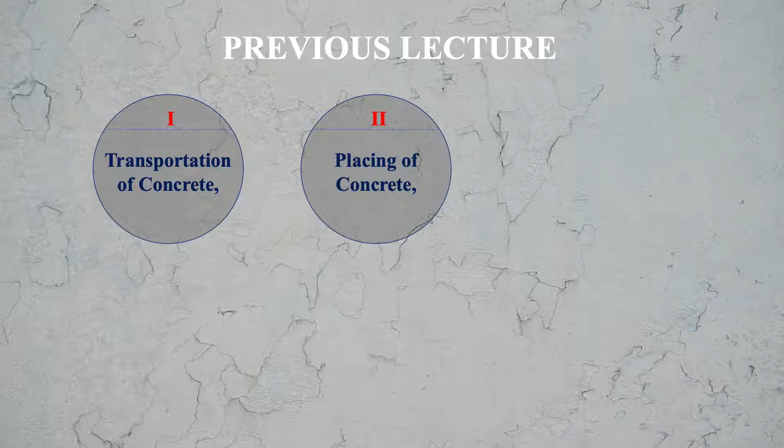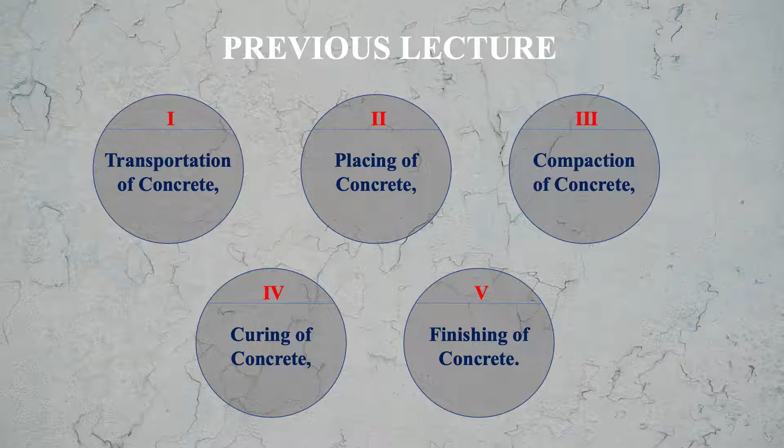Today I will discuss with you joints in concrete and formwork. In previous lectures, I discussed with you transportation of concrete, placing of concrete, then compaction of concrete, then curing of concrete, then finishing of concrete. Now, today we will be discussing two topics. One is joints in concrete construction and another one is formwork. So let us begin with joints in concrete.

So what is the need of providing joints in concrete construction? When the large concrete members such as factory floors, workshop floors, long columns, residential floors, road pavements, airfield pavements, etc. are constructed, it is not practicable and advisable to place the concrete continuously in one stretch. A joint is left between subsequent concreting stretches and it is called a construction joint. So this is what the construction joint is.

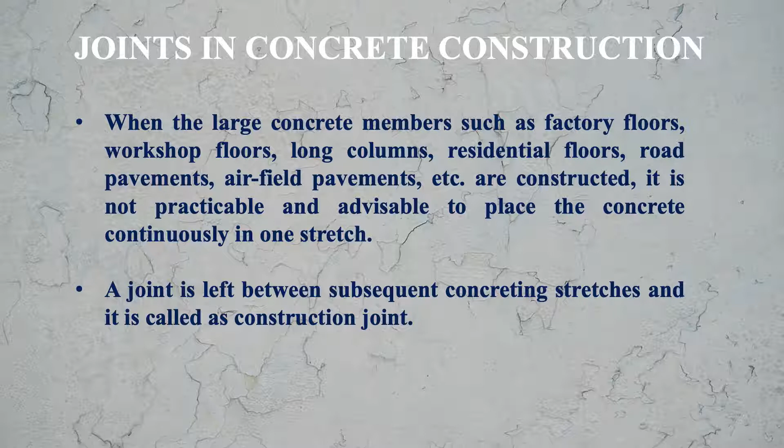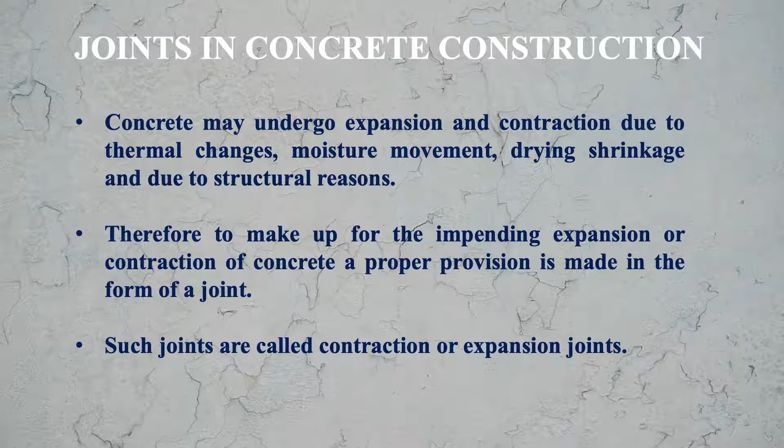Why do we provide them? Concrete may undergo expansion and contraction due to thermal changes, moisture movement, drying shrinkage, and due to structural reasons. So to make up for the impending expansion or contraction of concrete, a proper provision is made in the form of a joint. Such joints are called contraction or expansion joints. So let us see what are the different types of joints. Joints are classified into three groups. First is construction joints, second expansion joints, and third one is contraction joints.

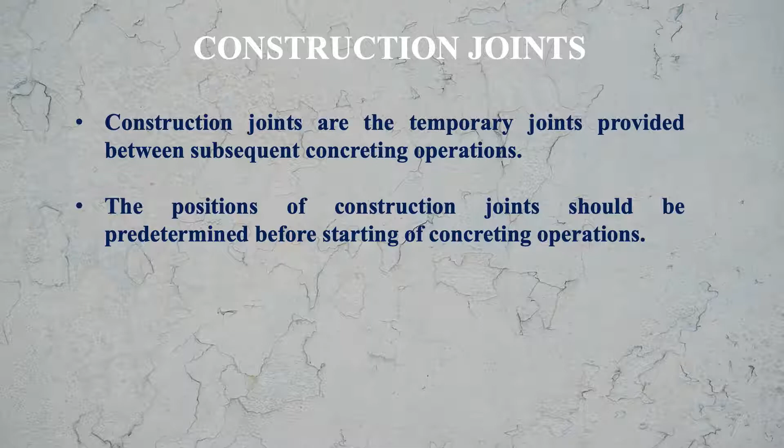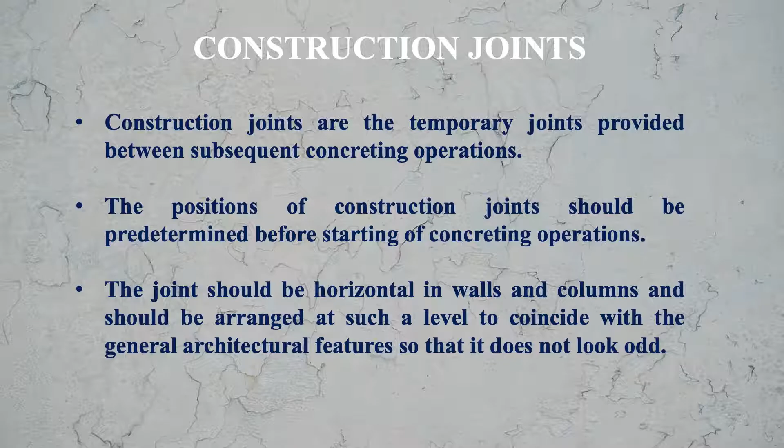Let us understand what these construction joints are. Construction joints are the temporary joints provided between subsequent concreting operations. The positions of construction joints should be predetermined before starting the concreting operation. We have to decide where we have to give the construction joint. The joint should be horizontal in walls and columns and should be arranged at such a level to coincide with the general architectural features so that it does not look odd. If there are some architectural features, it is better to make our construction joints coincide with them. Otherwise, they will be visible separately and it will look odd.

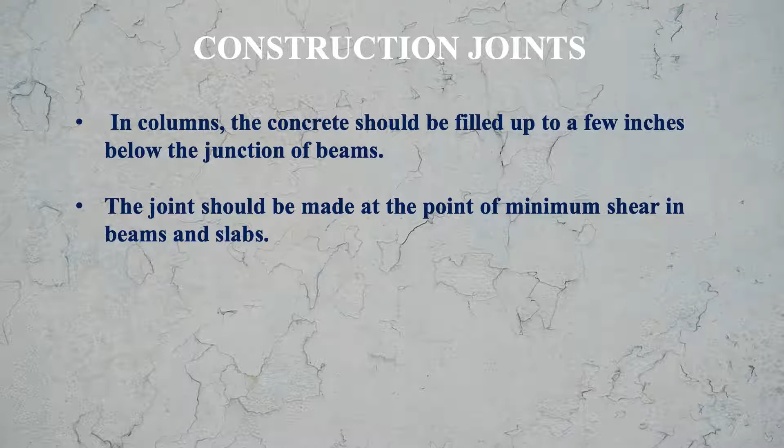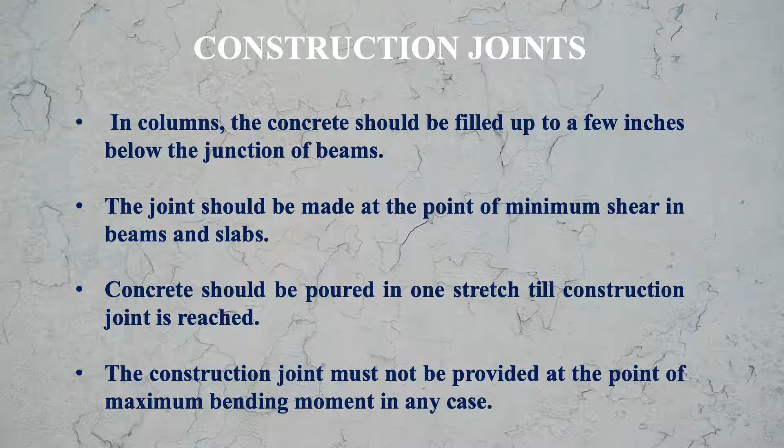In columns, the concrete should be filled up to a few inches below the junction of beams. The joint should be made at the point of minimum shear in beams and slabs. So this is the position where we should provide the construction joint. Concrete should be poured in one stretch till the construction joint is reached. Otherwise, another joint will be visible there. The construction joint must not be provided at the point of maximum bending moment in any case. Badly made and poorly finished construction joints will give an ugly appearance to the construction. Therefore, they must be properly finished. The joints must be made at such places that concrete comes under the least bending moment and shear force.

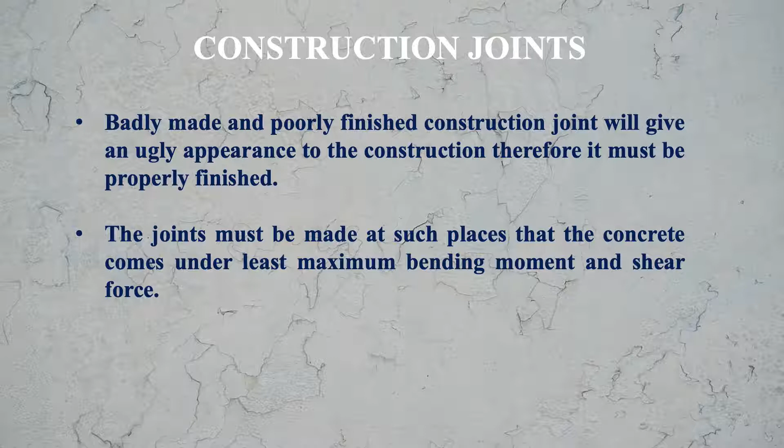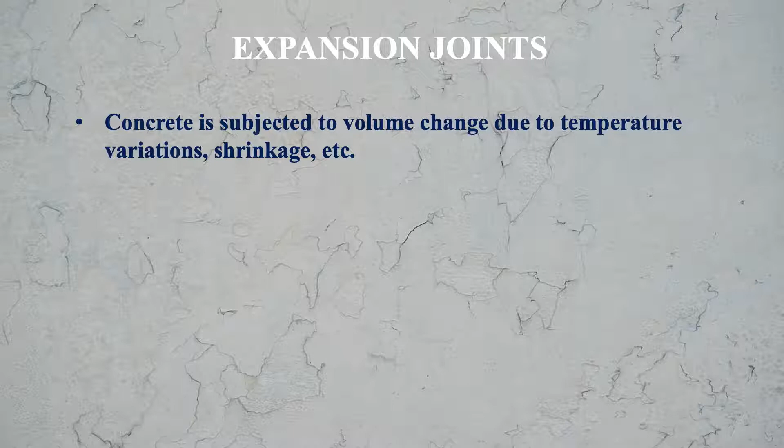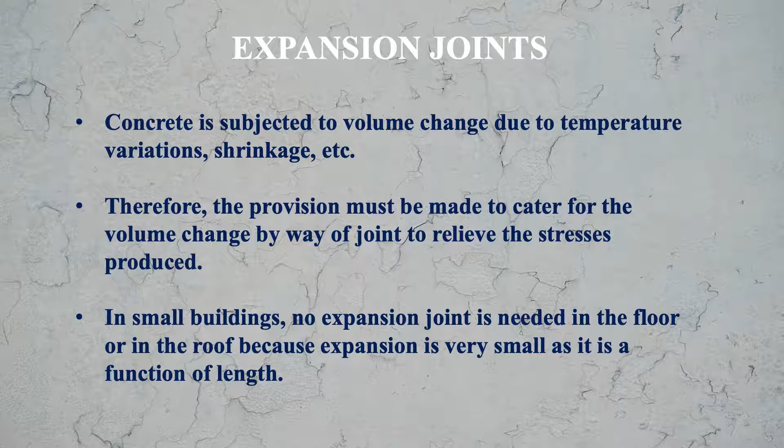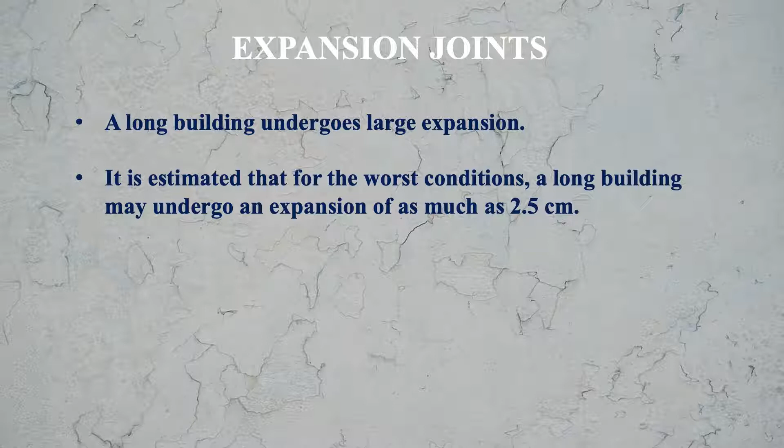Now let us understand what expansion joints are. Concrete is subjected to volume change due to temperature variations, shrinkage, etc. Therefore, provision must be made to cater for the volume change by way of a joint to relieve the stresses produced. In small buildings, no expansion joint is needed in the floor or in the roof because expansion is very small, as it is a function of the length of the member. A long building undergoes large expansion. It is estimated that for the worst conditions, a long building may undergo an expansion of as much as 2.5 cm. Therefore, buildings longer than 45 meters are generally provided with one or more expansion joints.

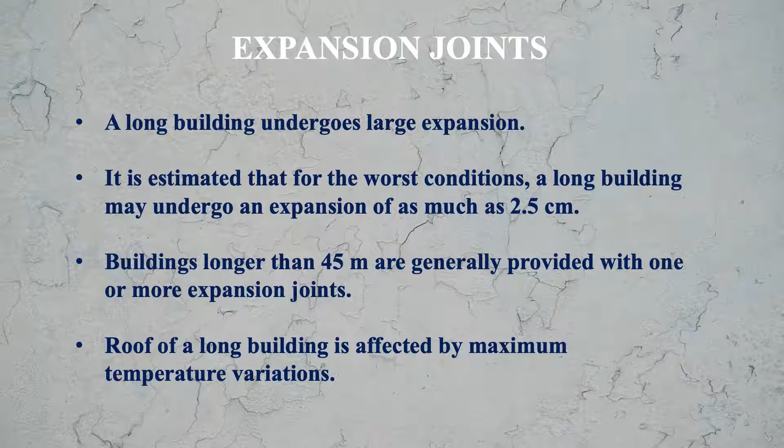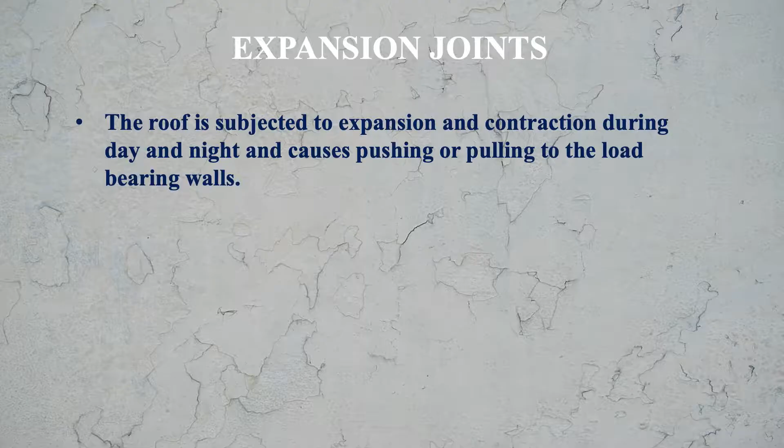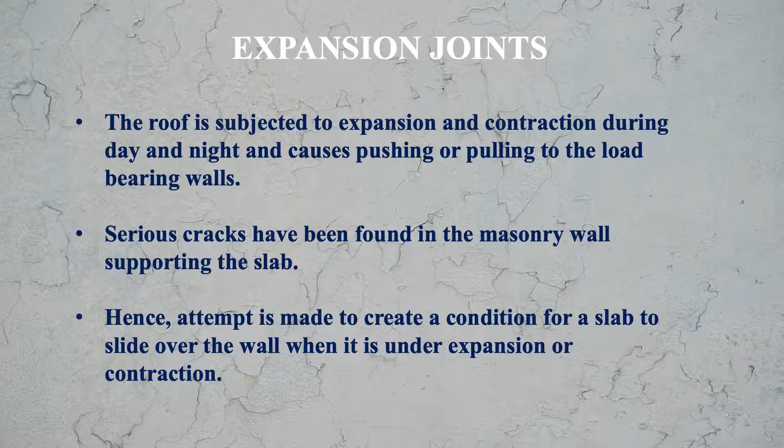The roof of a long building is affected by maximum temperature variations. The roof is subjected to expansion and contraction during day and night and causes pushing or pulling of the load bearing walls. Because walls are attached to the roof, when there is expansion or contraction, there will be pushing or pulling of the wall. Serious cracks have been found in masonry walls supporting the slab due to expansion and contraction. Hence, an attempt is made to create a condition for the slab to slide over the wall when it is under expansion or contraction. You provide a simple support where sliding of the roof over the walls is possible. So any expansion or contraction of the roof will not affect the wall.

Details such as the length of structure where an expansion joint is to be provided can be determined after taking into consideration many factors such as temperature, exposure to weather, time and season of laying of the concrete, etc. Under no circumstances shall a structure of 45 meters or more be without an expansion joint. In the past, expansion joints were provided at closer intervals in floors and pavements. These days, from experience, it is seen that concrete does not actually expand to the extent indicated by simple analytical calculations because of the frictional resistance offered by the subgrade. It is therefore possible to provide expansion joints at much farther intervals than in the past.

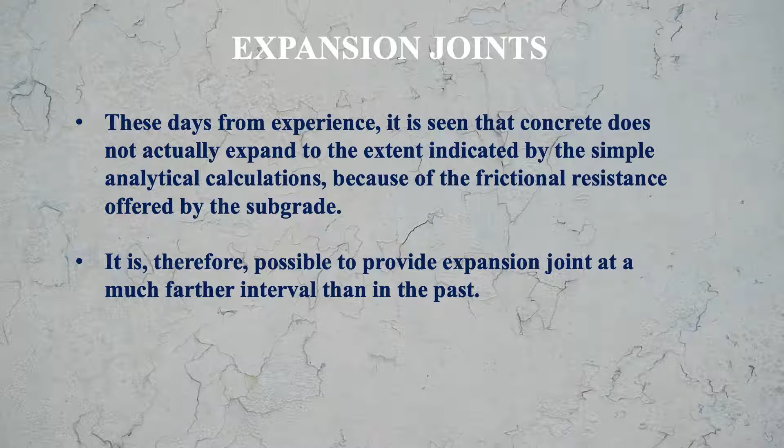Let us see what are the recommendations of IS Code 456 regarding these joints. In view of the large number of factors involved in deciding the location, spacing and nature of expansion joints, the provision of expansion joints in reinforced cement concrete structures should be left to the discretion of the reinforced cement concrete designer. Means the designer should decide.

For purposes of general guidelines, however, it is recommended that structures exceeding 45 meters in length shall be divided by one or more expansion joints. Means in such buildings there should be one or more expansion joints as needed.

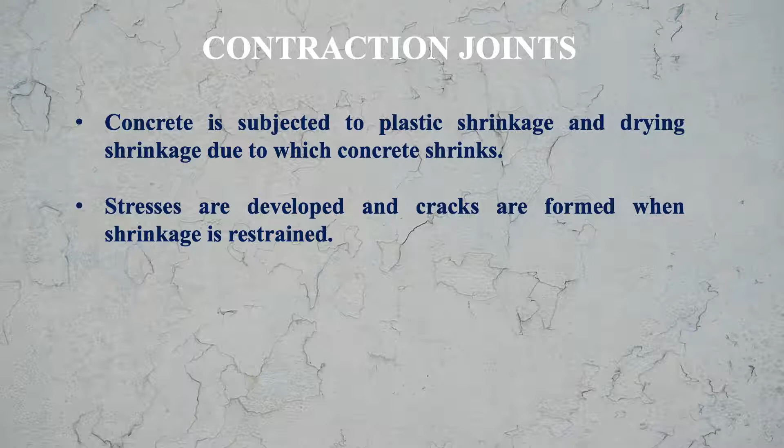Now let us move to contraction joints. Concrete is subjected to plastic shrinkage and drying shrinkage, due to which concrete shrinks. Stresses are developed and cracks are formed when shrinkage is restrained. Means if you are not allowing any shrinkage, then what will happen? The stresses will be developed and cracks may be formed. Contraction joints are provided to avoid these cracks.

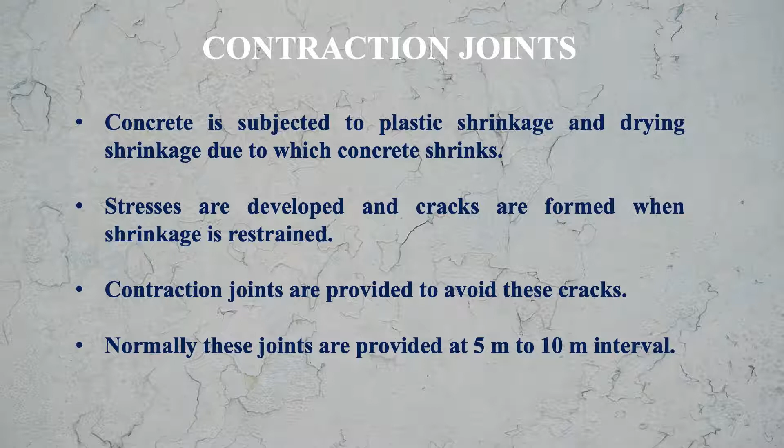Normally, these joints are provided at 5 meter to 10 meter intervals. After 5 meters or 10 meters of length, these joints are provided. Contraction joints are also called dummy joints or control joints. These joints will not be required if a provision is made to take up the shrinkage stresses by reinforcement. Means if reinforcement is able to take up the shrinkage stresses, then these joints are not required. Hence, contraction joints are provided in unreinforced floors and pavements.

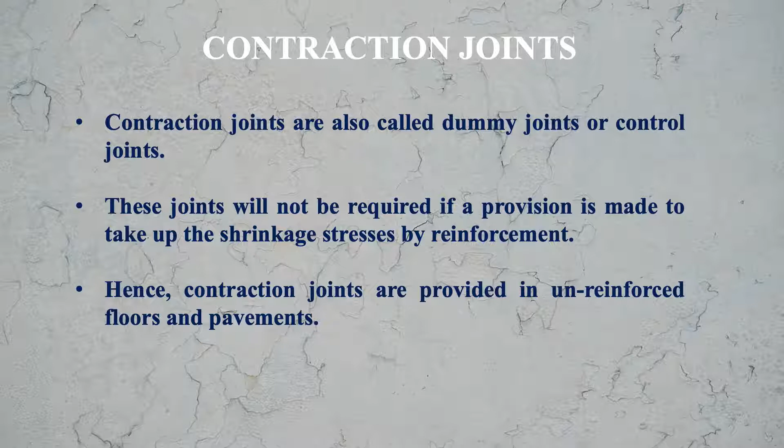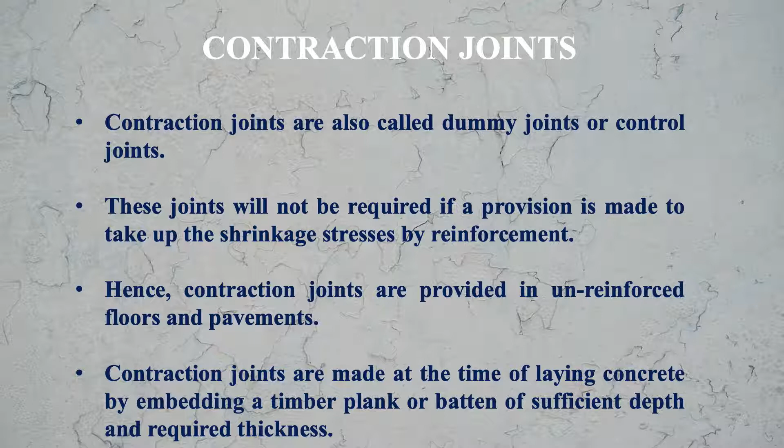Contraction joints are made at the time of laying concrete by embedding a timber plank or batten of sufficient depth and required thickness. This is afterward removed when the concrete is hardened. Sometimes steel plates of required thickness and width are forced down into the fresh concrete and then removed when the concrete is hardened. Sometimes contraction joints of required width and depth are cut by using a joint sawing machine.

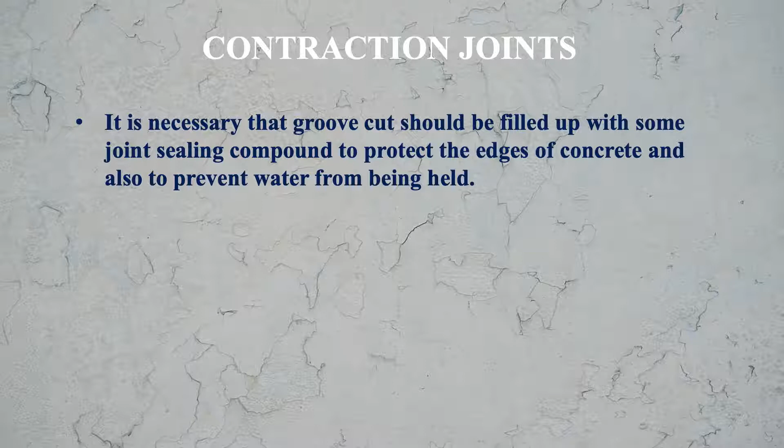It is necessary that the groove cut should be filled up with some joint sealing compound to protect the edges of concrete and also to prevent water from being held. The depth of the joint should be about 2 cm.

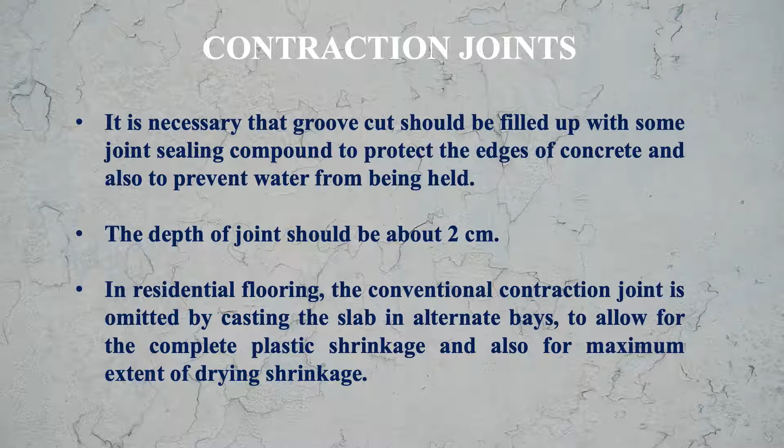In residential flooring, the conventional contraction joint is omitted by casting the slab in alternate bays to allow for the complete plastic shrinkage and also for the maximum extent of drying shrinkage. You will be casting the slab in alternate bays, not continuously. It is usual practice to place a glass strip or aluminium strip in between the bays to create discontinuity between adjacent bays to prevent the development of continuous cracks.

You must have seen that the floor is divided into different bays, and these bays are separated by glass strips or metallic strips, and if there is some crack, it will not go further into another bay because of this glass or metal strip. So this is all about the joints.

Now let us move to formwork. This is also a very important part of the concreting operation, because if our formwork is of good quality, then our construction quality will be good. The temporary construction used as a mold for the structure in which the concrete is placed and in which it hardens is called formwork. It is the mold in which the concrete is poured and where it hardens, because whatever shape you want for your structural element, you have to make the formwork of that shape.

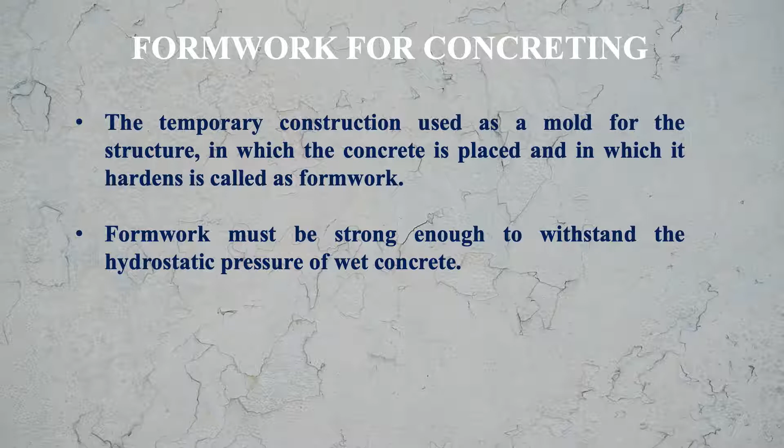Formwork must be strong enough to withstand the hydrostatic pressure of wet concrete. When you pour the wet concrete in the formwork, it will apply a hydrostatic pressure, means in the lateral direction it will try to dislodge the formwork because it is applying a lateral pressure over the formwork. So the method of compaction, size and shape of formwork also affect the shutter pressure.

This pressure depends upon the method of compaction, because when you are compacting the concrete, again the pressure will come on the formwork. Also the size and shape of the formwork will also affect the pressure coming over the formwork.

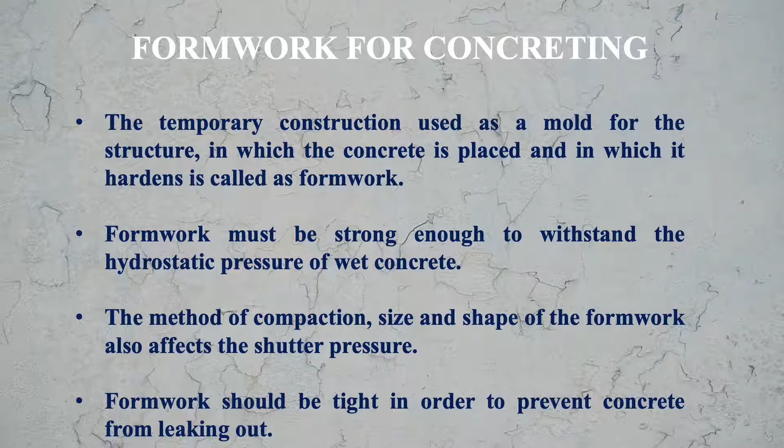Formwork should be tight in order to prevent concrete from leaking out. This is a very important thing, because if that concrete is leaking, then first of all the cement paste will come out and it will make the concrete weak. And second thing, if it leaks out and hardens, it will have a very bad appearance on the surface of the element. Formwork should be easy to handle so that no time is wasted in assembling and disassembling.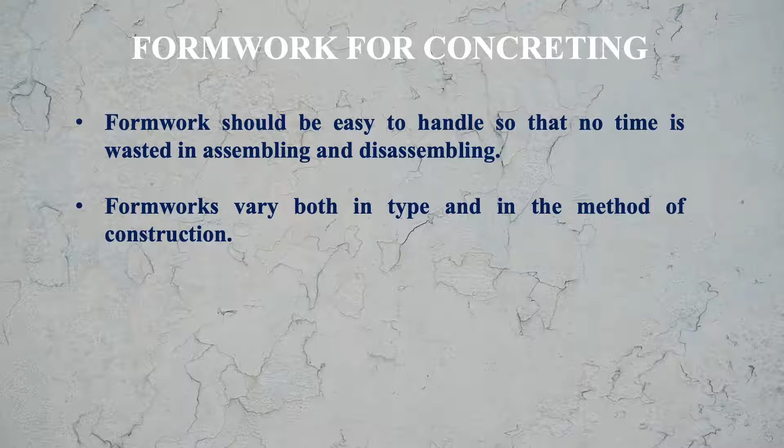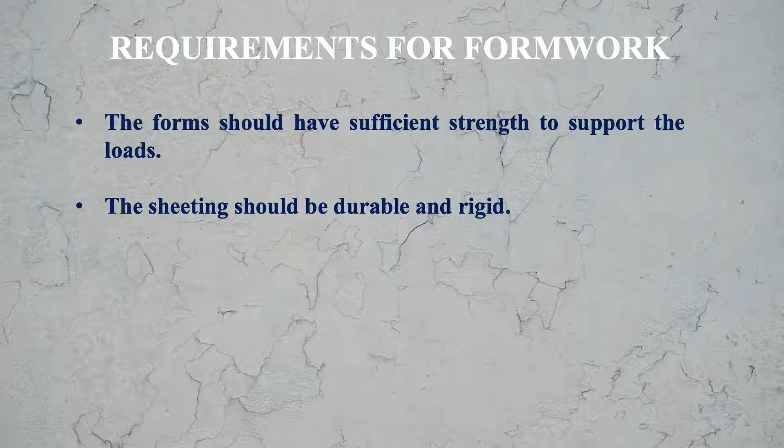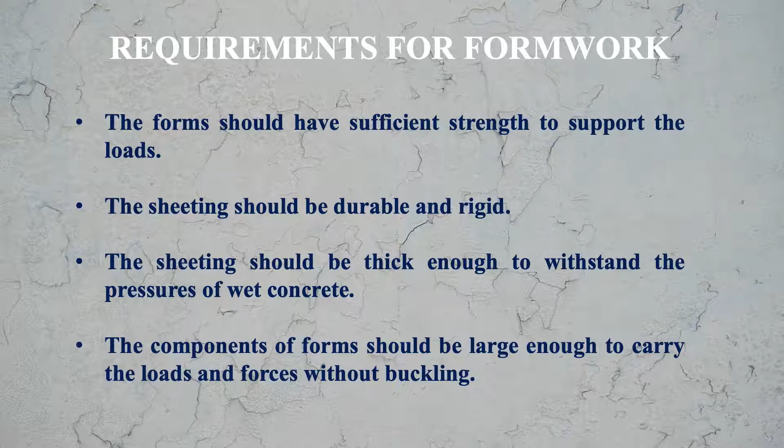Formworks vary both in type and in method of construction. Let us see what are the requirements for formwork. The form should have sufficient strength to support the load, first of all. The sheeting should be durable and rigid. The sheeting should be thick enough to withstand the pressure of wet concrete. The components of forms should be large enough to carry the loads and forces without buckling. Means it should safely carry the load and there should not be any buckling.

The formwork should be of reasonable size and weight for easy handling, transportation and erection. Means the very important thing here is that size should not be very large or very heavy, otherwise it will create problems in handling, transportation and erection. The formwork should be easily and speedily erected.

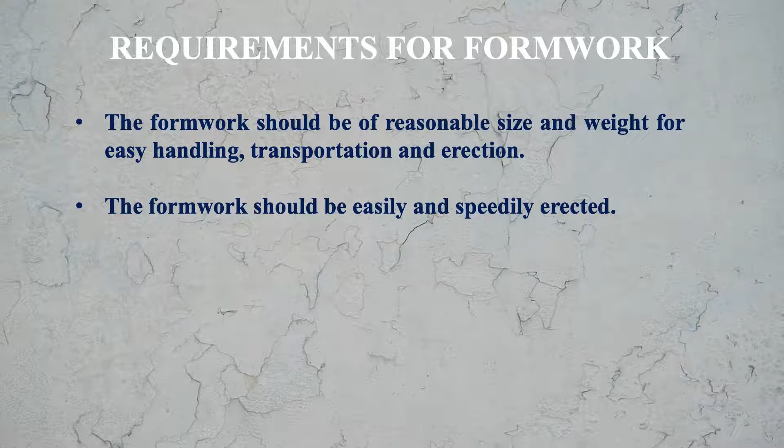The form surface should give a smooth finishing, because the appearance of your structural member or concrete member will depend upon the smooth finishing, and if the surface of the formwork is not smooth, the surface of your concrete member will not be smooth. So it is very important that the surface of the form should be smooth in finishing. The joints of the form should be tight enough to prevent any material leakage.

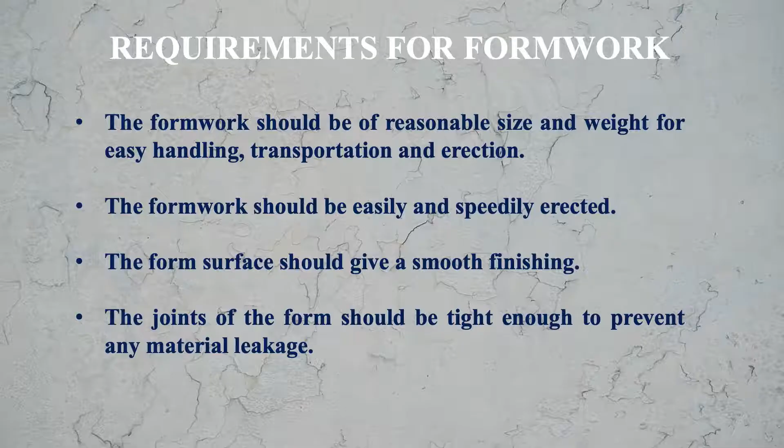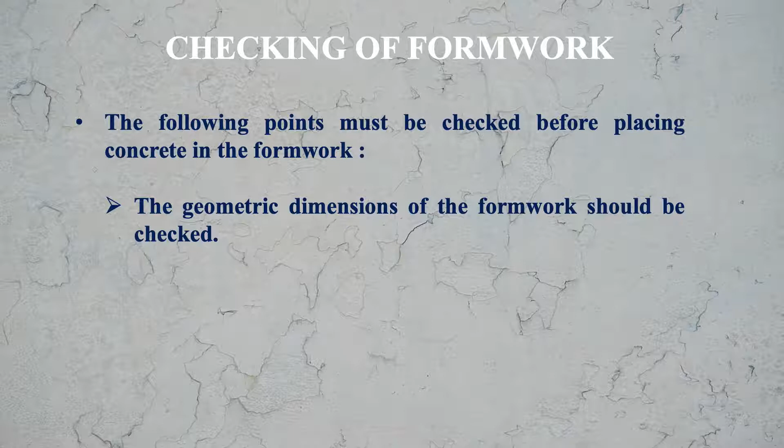Now, how do we check the formwork? First of all, the geometric dimensions of the formwork should be checked, because these dimensions will finally decide the dimension of your concrete member. So we have to be very particular about the geometrical dimensions of the formwork. The accuracy of the horizontal surfaces should be controlled by levels and vertical surfaces by plumb bobs, because it should provide a level surface in the horizontal plane. So we check its level with levels, and it should be vertical also, so its verticality we can check with plumb bobs.

The sawdust, nails, mud particles etc. should be removed before placing concrete. The alignment of the formwork should not be disturbed during concreting operations. Oiling should be done in order to prevent sticking of concrete with formwork and to ensure a smooth surface of concrete. The joints in the formwork should be checked to avoid the leakage of the material. The old surface should be wetted before placing the concrete.

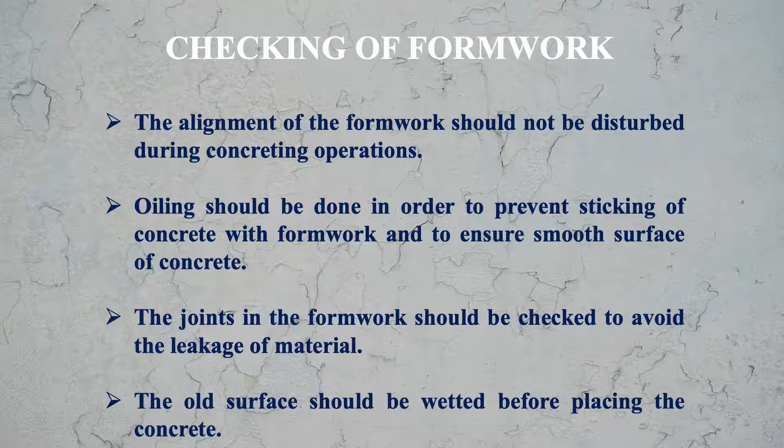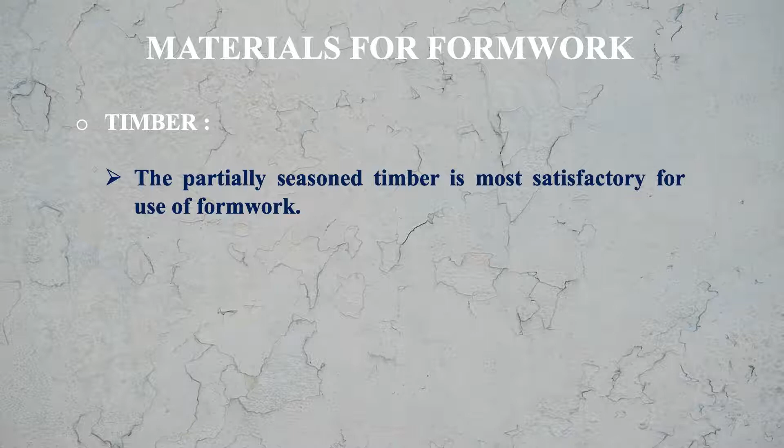Now let us see what are the different materials used for making the formwork. So first of all, we will discuss timber. Partially seasoned timber is most satisfactory for use in formwork. Green timber dries out and shrinks. It causes fins and ridges on the concrete. So we should not use green timber for making formwork.

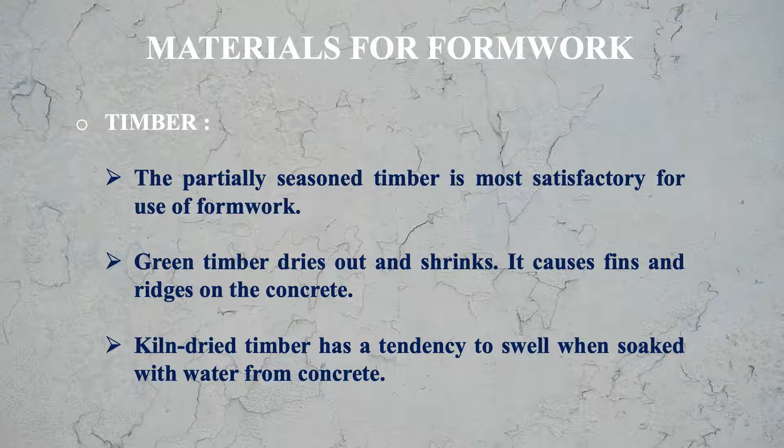Kiln-dried timber has a tendency to swell when soaked with water from concrete. It causes bulging and distortion if the boards are tightly joined. So provision for slight swelling should always be made in case of seasoned timber.

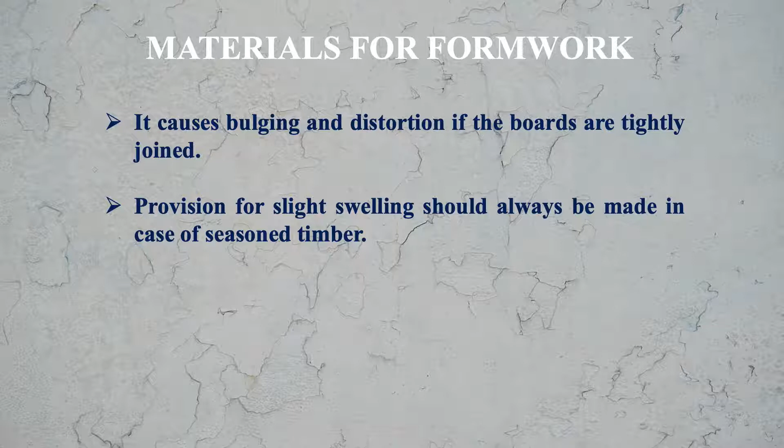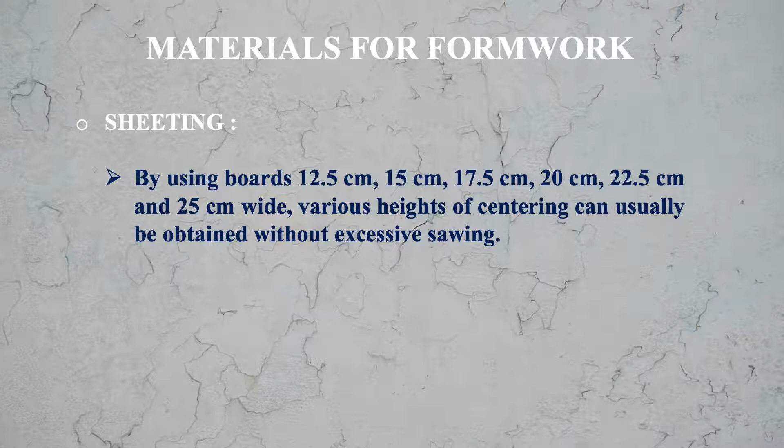Let us see how we make sheeting of timber. We make the sheeting of timber by using boards 12.5 centimeter, 15 centimeter, 17.5 centimeter, 20 centimeter, 22.5 centimeter and 25 centimeter wide. Various heights of centering can usually be obtained without excessive sawing. Thin sheeting, which is 2.5 centimeter, is used for the sides of the beams and column boxes. Sheetings of 3.75 centimeter to 5 centimeter are used for the soffits of beams.

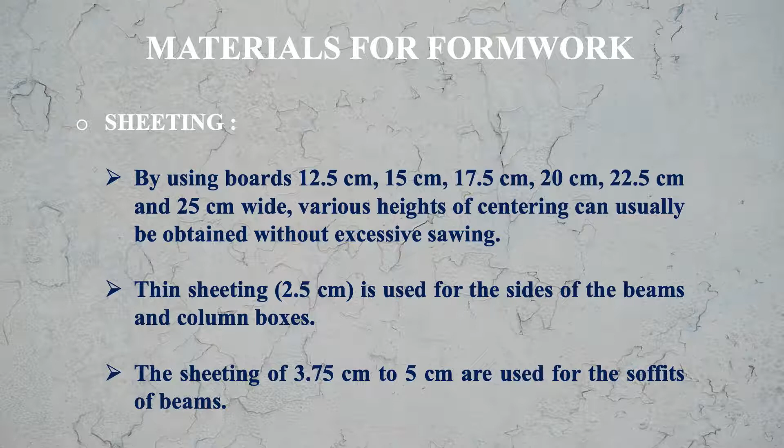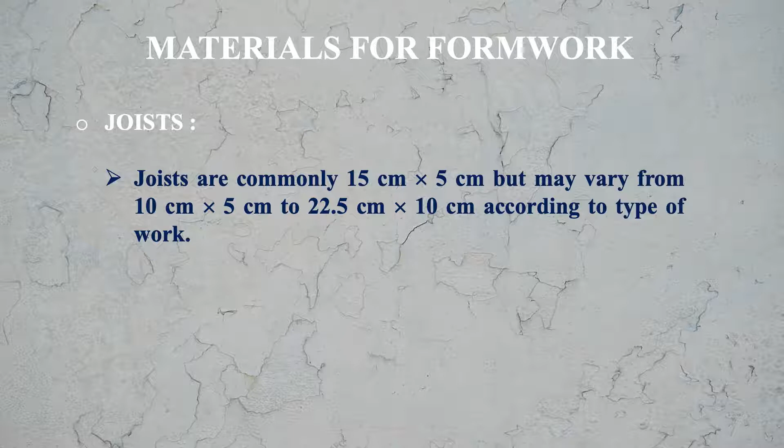Let us see how we make the timber joists. Joists are commonly 15 centimeter by 5 centimeter but may vary from 10 centimeter by 5 centimeter to 22.5 centimeter by 10 centimeter according to the type of work. Let us see the timber posts. Posts may be 7.5 centimeter by 10 centimeter to 12.5 centimeter by 12.5 centimeter.

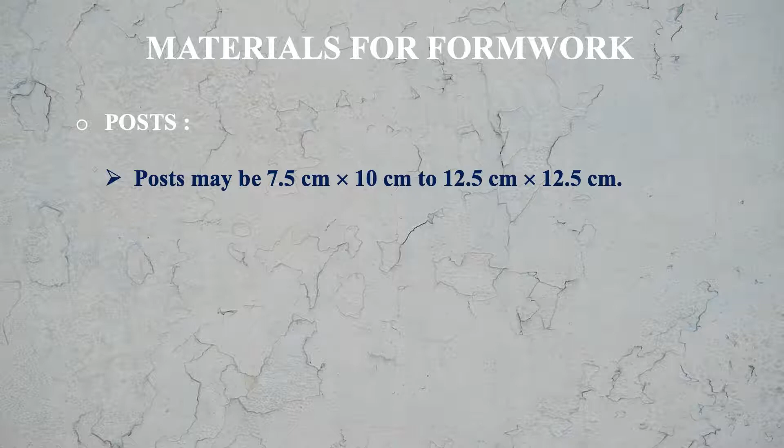How we make the timber studs, wales, head trees, subsidiary bearers and transoms. These may vary from 10 centimeter by 5 centimeter to about 12.5 centimeter by 12.5 centimeter. Sections about 7.5 centimeter by 5 centimeter are useful for general bracing and light shuttering. So these are the things about the timber.

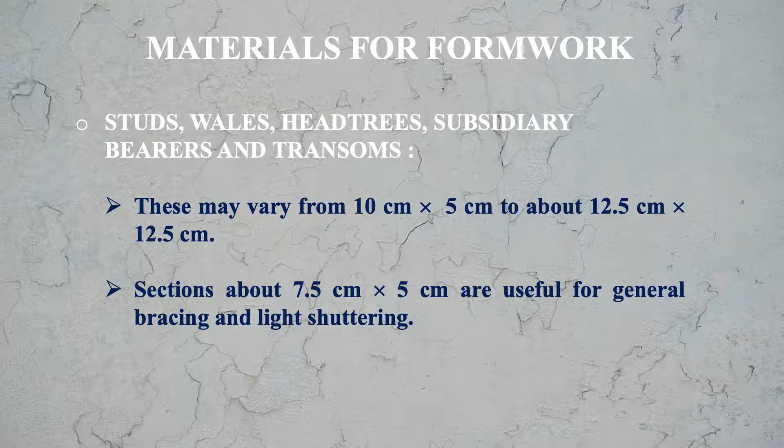Now let us see about steel, how steel form is made and what are the different properties. Steel forms can be used as many number of times as desired and as such are economical. Why are we saying this here? Because timber formwork has the problem that it cannot be used many times, because by nailing and using, timber formwork sometimes gets distorted or there are cracks in it, so it can be used up to a limited number of times only.

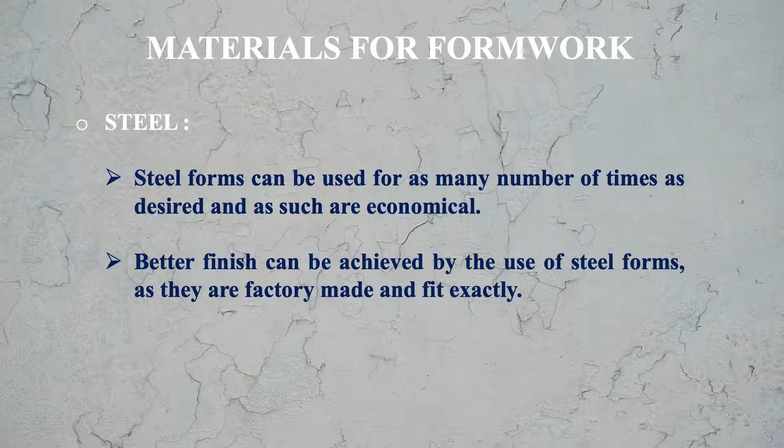Whereas steel can be used many times, so that makes the use of steel formwork economical. Better finish can be achieved by the use of steel forms as they are factory made and fit exactly. This is also a very good thing about steel formwork, because they are made in factories and fit exactly, so they provide a very good finish and very smooth surfaces.

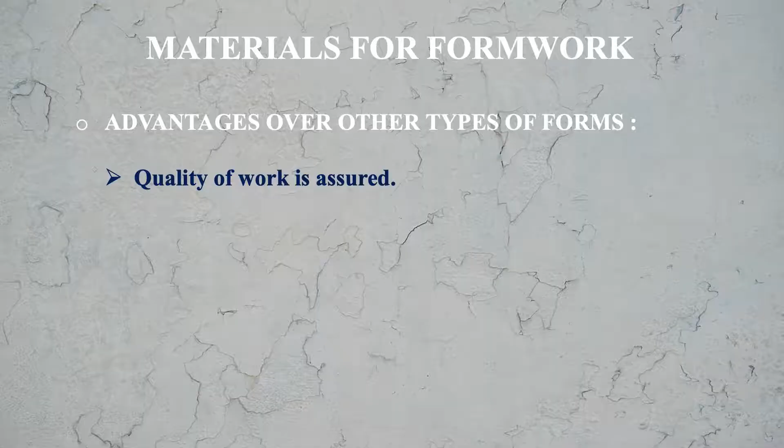Now let us see the advantages of steel formwork over other types of formwork. In steel formwork, quality of work is assured, because as I told you they are factory made and fit exactly, so they provide a very good finish. Wastage of material is eliminated, because in case of timber we size the timber planks and other timber material according to the use, so it is cut many times as per the requirement and there is wastage of material. In case of steel we are not cutting it into any piece, so wastage of material is eliminated. Handling and transportation costs are reduced.

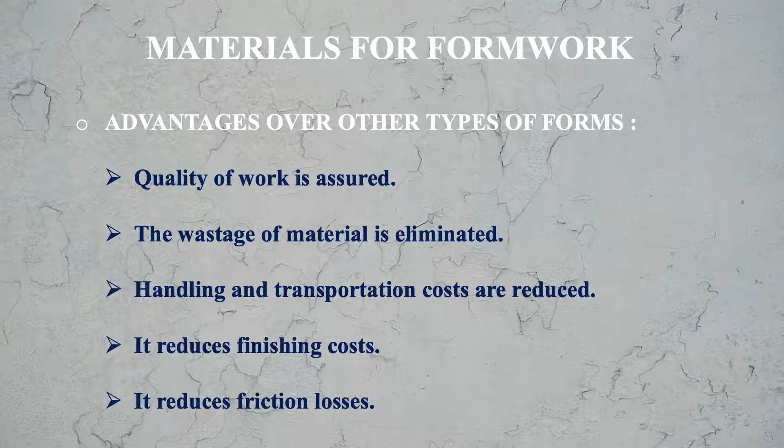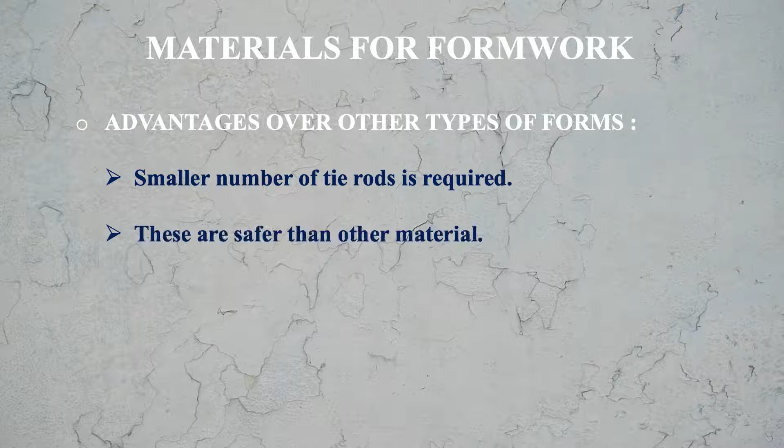It reduces finishing cost also. It reduces friction losses. A smaller number of tie rods is required in case of steel form. These are safer than other materials. In order to obtain additional uses of the steel forms, adjustment of various sizes can easily be incorporated in the design of steel forms. Collapsing and stripping is a smooth and gradual operation because it is usually controlled by jacks.

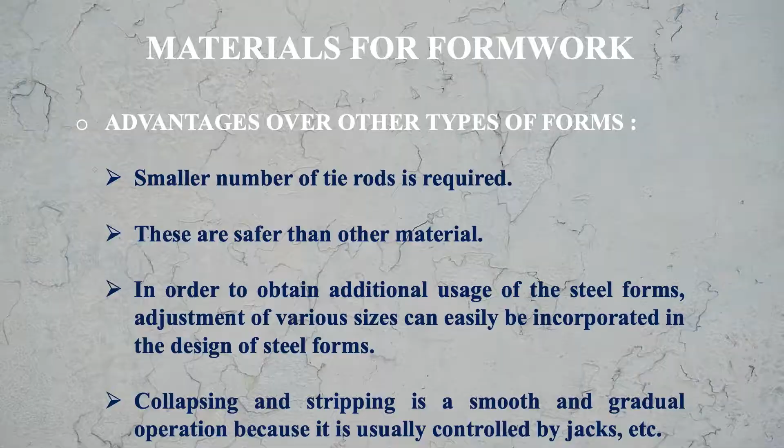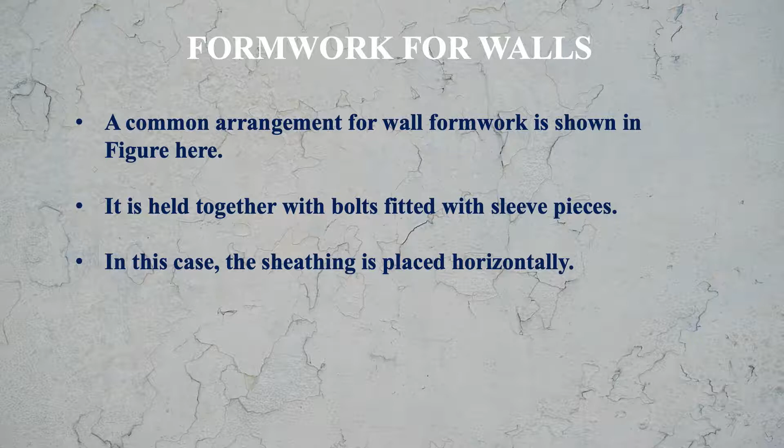It is held together with bolts fitted with sleeve pieces. In this case, the sheathing is placed horizontally, as you saw in the figure. It spans between vertical studs. Under the horizontal pressure due to wet concrete, the pressure on either side of the form is self-balanced.

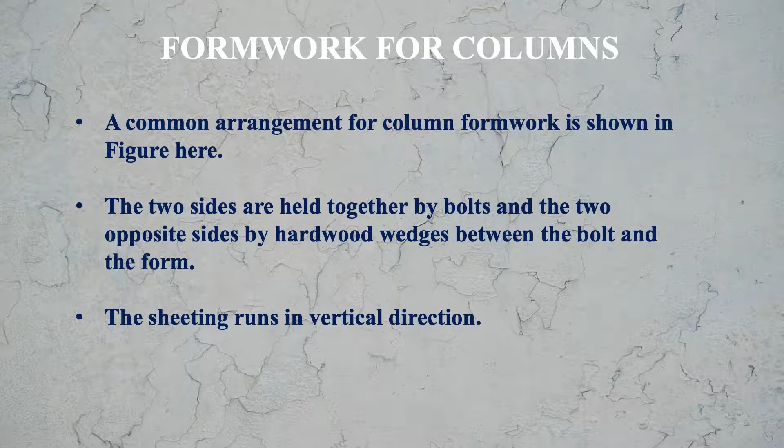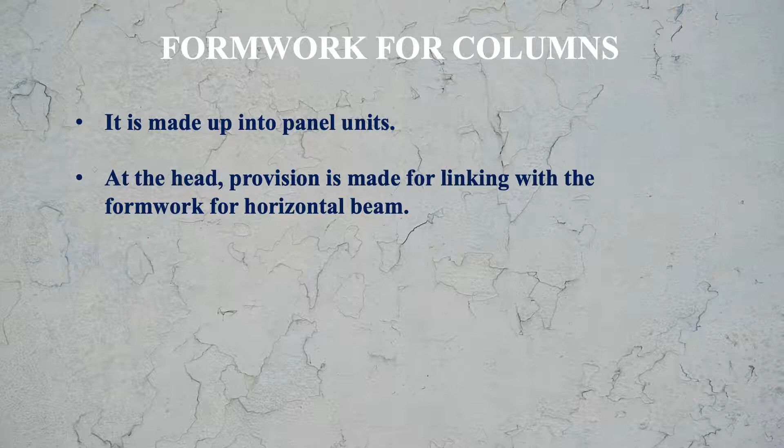The two sides are held together by bolts and the two opposite sides by hardwood wedges between the bolt and the form. The sheeting runs in the vertical direction, as you saw in the figure. It is made up into panel units. At the head, provision is made for linking with the formwork for the horizontal beam. So for monolithic construction, you can join the formwork of the column and the formwork of the beam. Now let us see the formwork for beams and slabs.

The formwork in case of beam is constructed in such a way that the sides may be stripped before the soffit. Means here there is a provision that you can remove the side pieces and soffit will remain in that place from the same formwork.

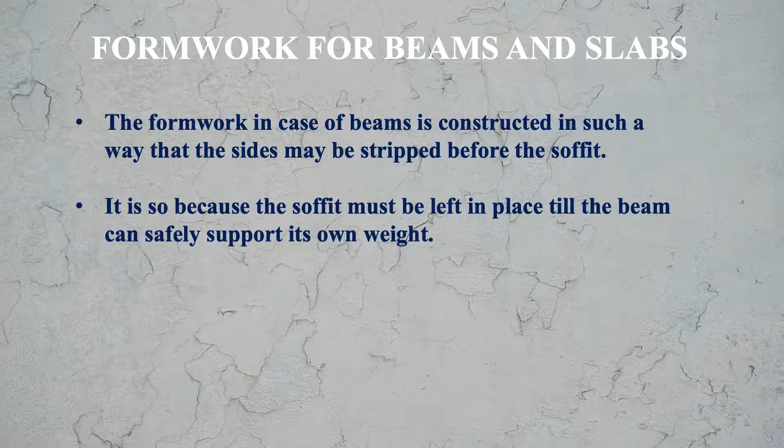So it is so because the soffit must be left in place till the beam can safely support its own weight. Because here soffit is providing support to take up the weight of the beam, and it should remain in its place till the beam is hard enough to take up its own weight. So up to that time, soffit has to be there, but you can remove the sides of the formwork.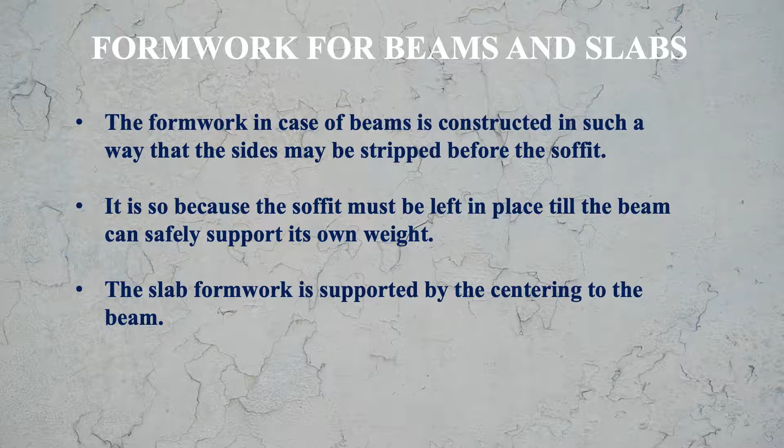Now let us discuss about the faults in erection of formwork. What may be the faults while we are erecting the formwork? First of all, sheeting may be too thin. So we have to be very careful that sheeting should have sufficient thickness. The bad sheeting joints which will lead to leakage of concrete. We should avoid such bad joints.

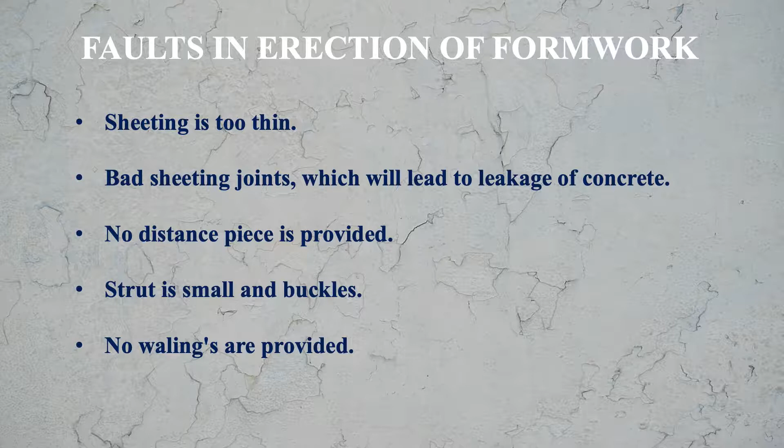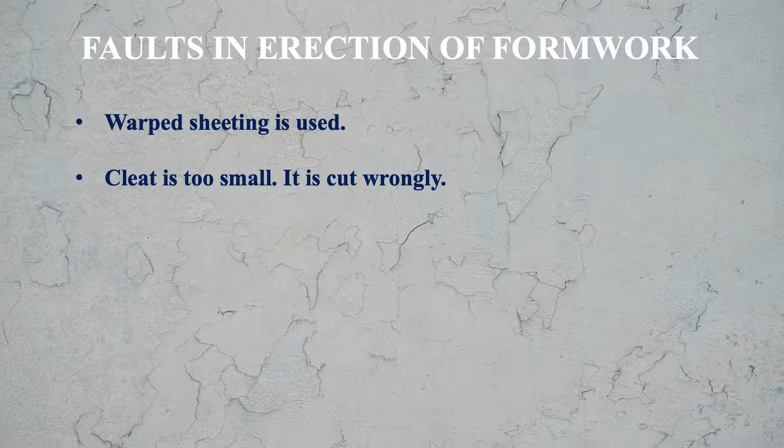No distance piece is provided. Then strut is small and buckles. Then no walings are provided. Another fault is that warped sheeting is used. Another one may be that cleat is too small, it is cut wrongly. Also, sole plate is not provided, which will cause uneven distribution of load to ground.

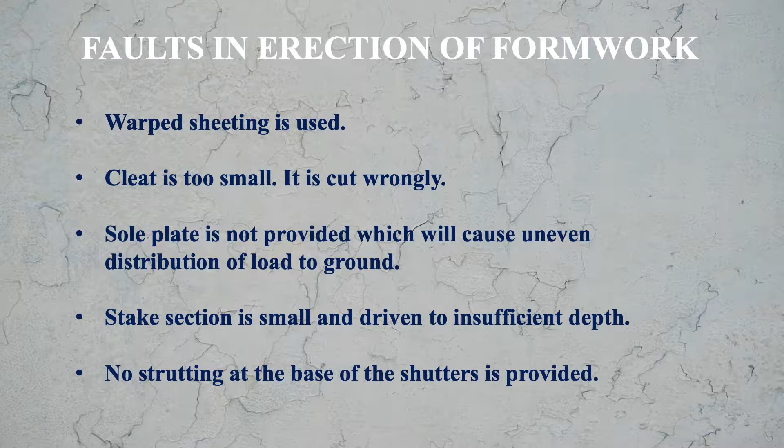Then another problem may be that stake section is small and driven to insufficient depth, and there may be cases when no strutting at the base of the shutters is provided. So these are some possible faults which may come into picture because of the mistakes or bad workmanship. So we have to be very careful and we should avoid such type of faults for safe construction and getting a good construction.

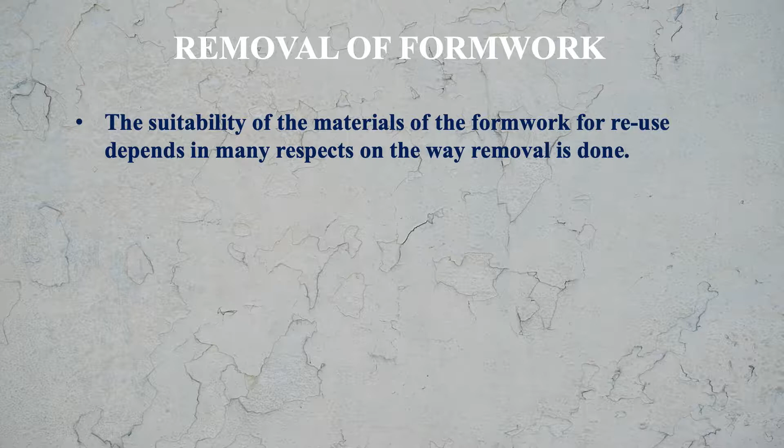Now finally we come to the removal of formwork. When we can remove the formwork? The suitability of the materials of the formwork for reuse depends in many respects on the way removal is done. The shuttering boards frameworks are broken, the smooth surface is damaged, and the bracing is bent if the forms are not removed carefully. So that way it is very important. We have to be very careful while removing the formwork. Therefore, removal of formwork should be carried out in a careful and orderly way.

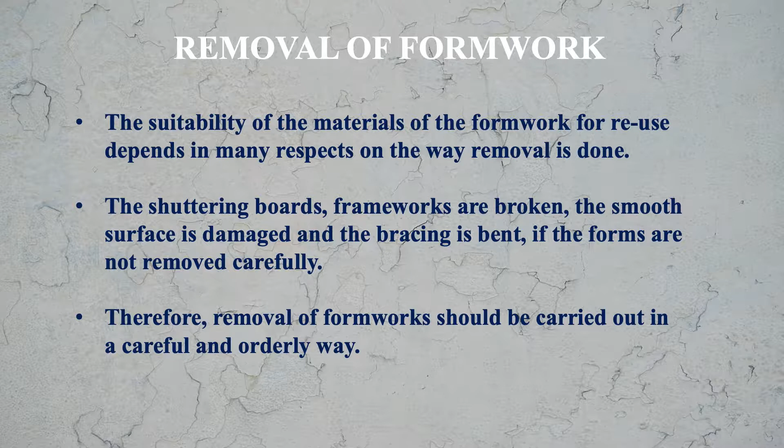Formwork should not be removed without specific instructions from the engineer in charge. The engineer in charge, before issuing instructions, should make sure that the concrete has attained sufficient strength to carry its own load and any other load which is carried at the top. The sides of the formworks which are not loaded by weight of concrete member should not be removed before the concrete gains strength.

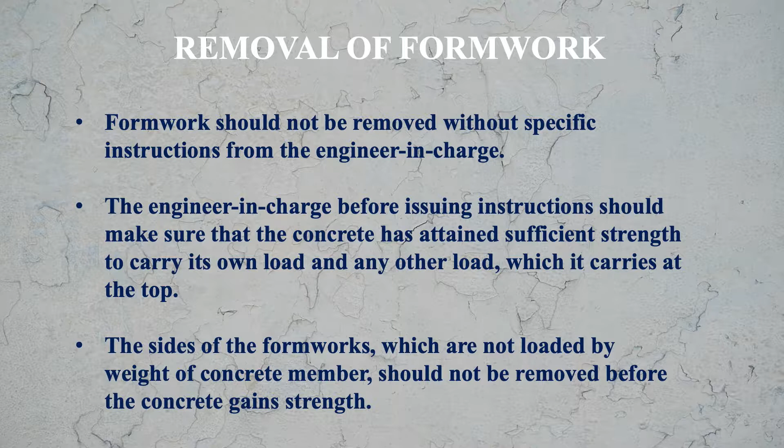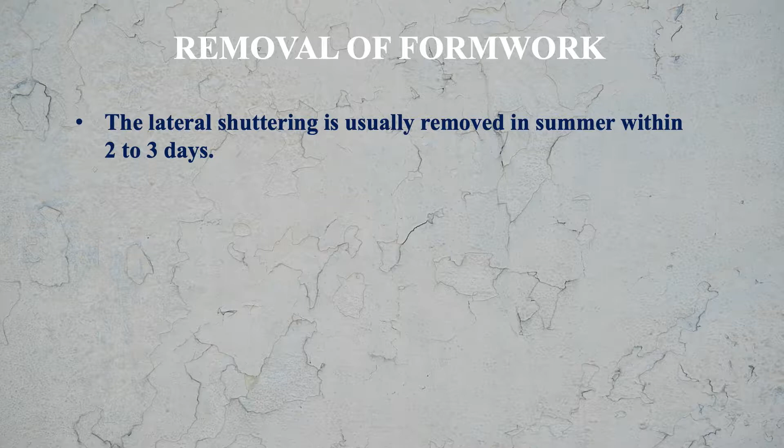The lateral shuttering is usually removed in summer within 2 to 3 days. Posts supporting the formwork of the load bearing structures should be removed only after stripping the sides of the form. Load bearing formwork should be removed only after concrete has gained strength.

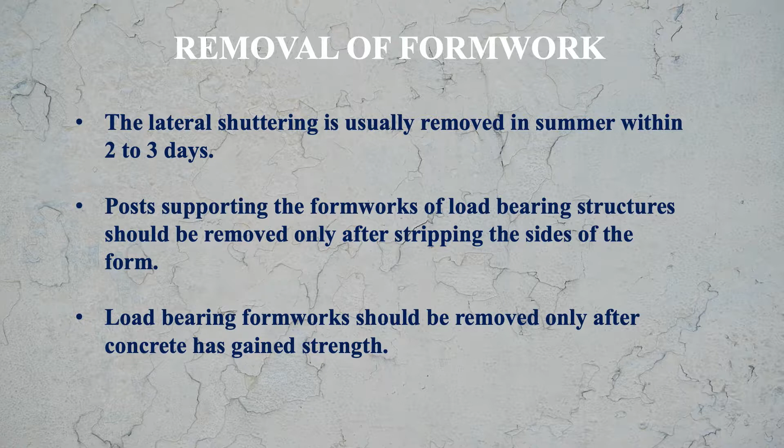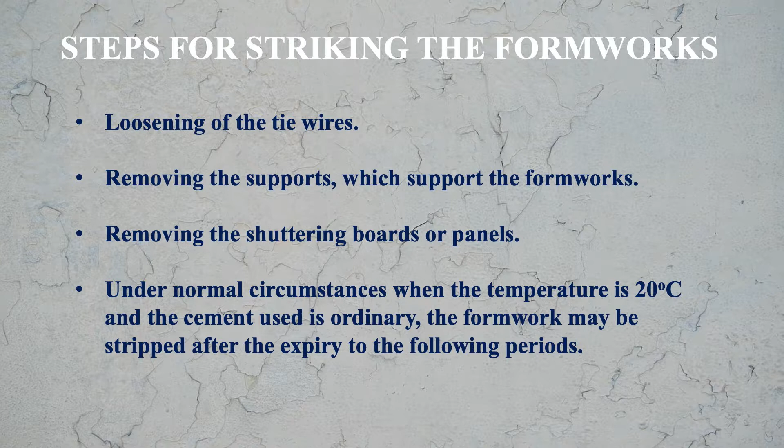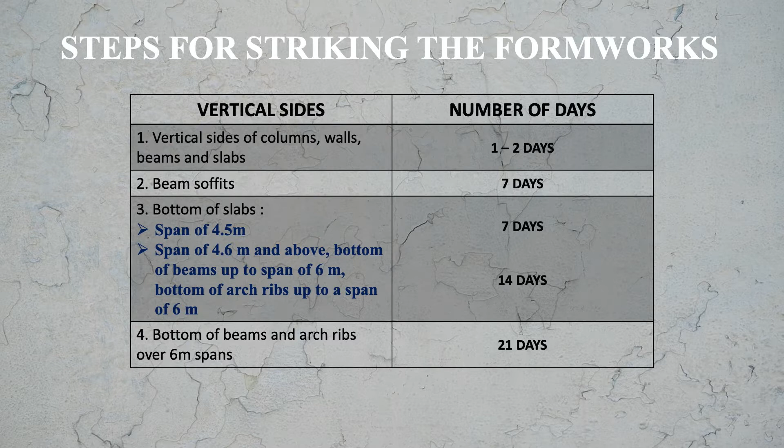Then for bottom of beams and arch ribs over 6 meter span, you can remove the formwork after 21 days. So these are the suggested periods after which you can remove the formwork.

So this way we have discussed in this lecture, first of all, the joints in concrete construction, and after that the formwork for construction.